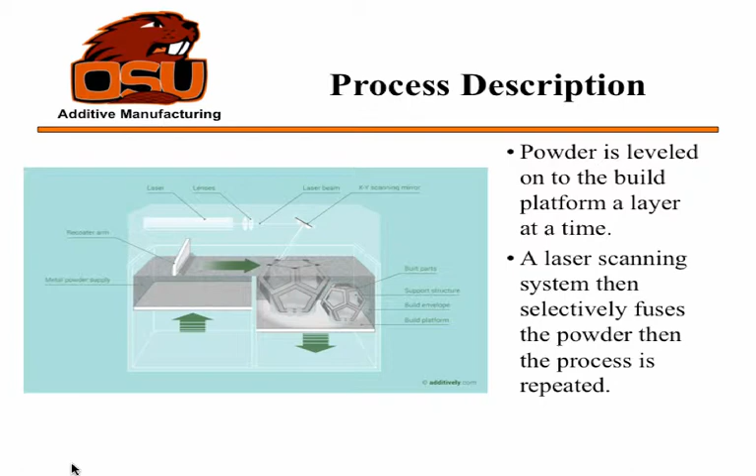Laser sintering with powder bed involves having powder leveled or spread thinly in a layer onto a build platform, with a laser then scanning and fusing where it has scanned, then progressing as it moves the build platform down. It repeats the process.

Some key process features or parameters that affect quality and resulting parts are things like laser power, laser scanning speed, laser scanning pattern, laser scan overlap, so how closely those scans are overlapped, and specific powder properties. Some powders produce a better surface finish than others.

Size of the powder: there's monomodal, which is a single size, bimodal, which is two sizes, a very fine powder and a larger powder, or there's varieties of powder properties.

Powder preheat temperature, build chamber pressure - that becomes important with volatile compounds like aluminum and magnesium, some of the lighter metals will actually vaporize and you'll lose constituents if it's not pressurized - and the physical layer height, so how much you're actually able to fuse.

Laser sintering, especially with a powder bed, is really good at fine features and fine internal structures. Compared to some other methods, it can achieve some of the best resolutions.

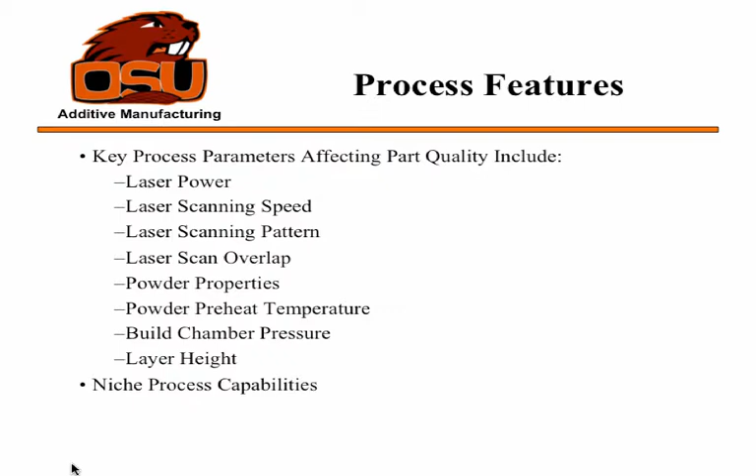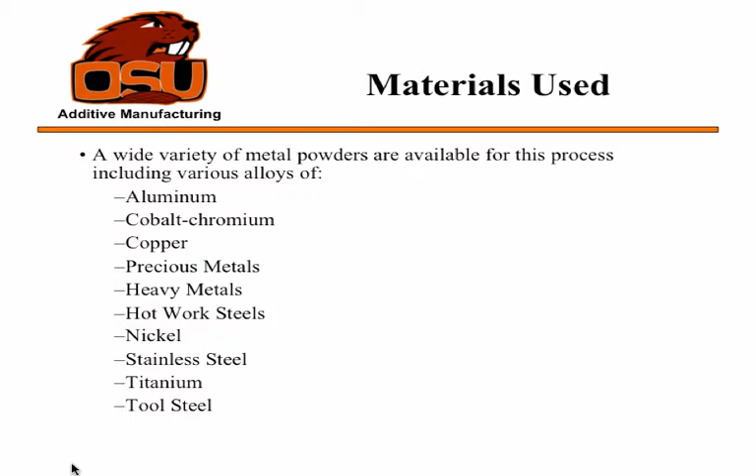Some of the materials used - there's a variety depending on the manufacturer, who offers several different materials and has characterized those for their machines. Various alloys of aluminum, cobalt-chromium, copper, other precious metals, some heavy metals, not a ton in that area, hot work steels, nickel, stainless steel, titaniums, and tool steels - all very useful engineering metals.

One of the case studies I was able to find was from EOS, which is a big player in the laser sintering market, especially with powder beds. They've been around for a long time, and this was in dental restoration, so dental labs.

The customer was Argen Corp, I think, and they make custom dental restorations. You're basically able to print a group of them at a time, and it reduced waste a lot. It was a very manual process prior to that, so it almost completely eliminated rework.

It'd be porcelain over a metal framework, how they do these. I like this quote: a skilled technician using traditional hand operations can make about 20 units in a day, where with this scanner, software, and a printer, they can make 80 units in a day. So that's productivity and increased revenue because of the productivity.

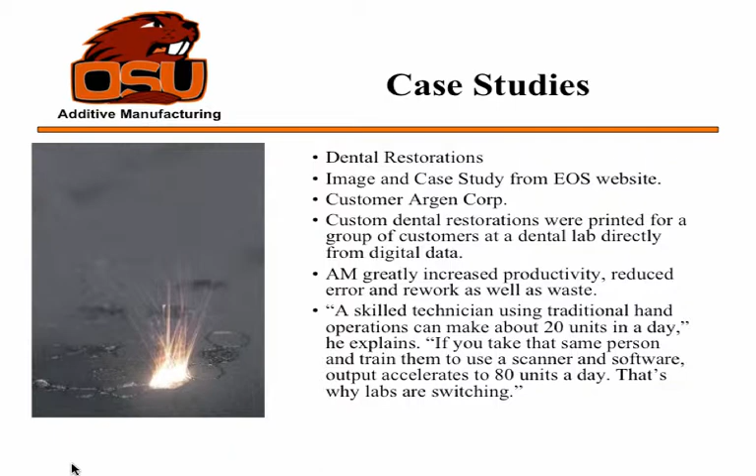Here's another really important application of laser sintering with a powder bed: tooling inserts, specifically for plastic injection molding. You're able to design these with a conformal cooling channel actually integrated into the tool, so you can cool complex features in a very uniform way, which decreases rejection rates and decreases cycle times.

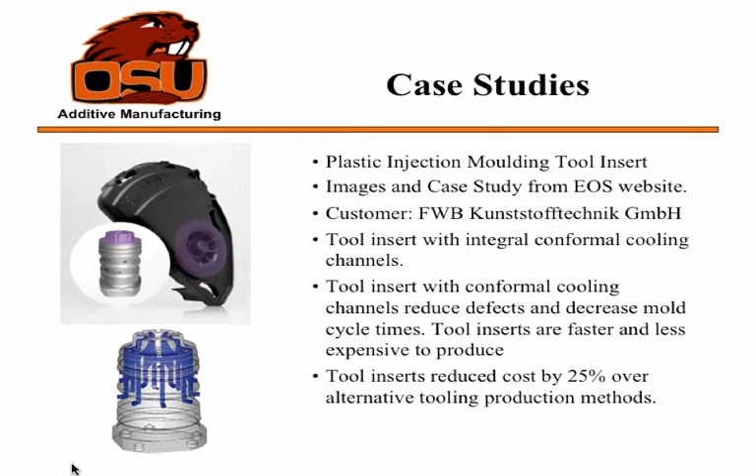It also reduces the cost of traditional tooling because these complex features can be made as standalone parts and then integrated into a larger mold, where the majority of the mold is fairly simple, and this one feature is very, very complex.

EOS is based out of Krailling, Germany, and they've got a variety of machines. The 280 and 290 are kind of their workhorses. They also have fiber lasers, 200 or 400 watt, with the same build size. The 290 has some additional post-processing and other material property monitoring.

They have one specifically for precious metals, for jewelers and things like that, and it has a more meticulous powder handling system because you don't want to just let gold powder go everywhere - it's really expensive.

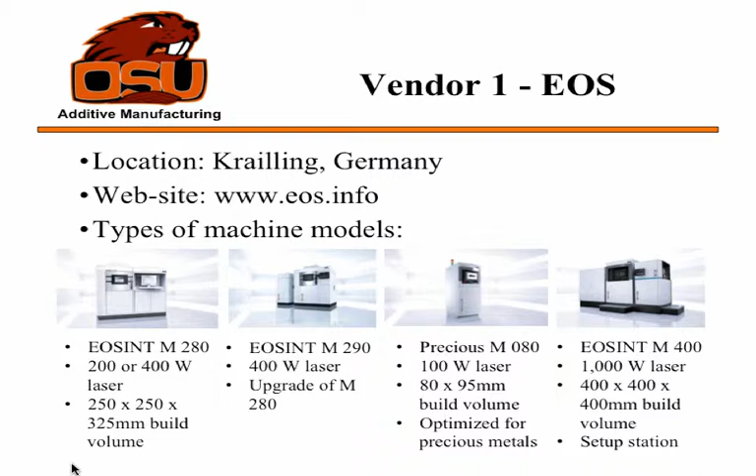They also have a more production-based machine where you can have interchangeable build setup stations to ease and speed up production, a large build area, and a 1 kilowatt fiber laser as well. They've been in business since 1989, and making laser sintering machines for 20 years.

They started in 1995, and they have probably the majority of the market share with over 1,000 machines sold to date. They also offer both metal and plastic laser sintering.

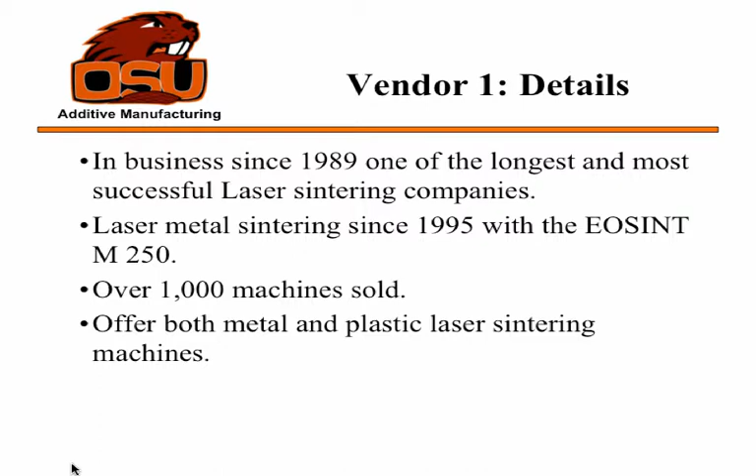The second vendor I wanted to highlight is called SLM Solutions. They're also out of Lübeck, Germany, and they've got an entry level 100, 200 watt laser with a small build platform, then step up to a 400 watt or 1 kilowatt laser with a larger build platform, about the same as the EOS 280, 290.

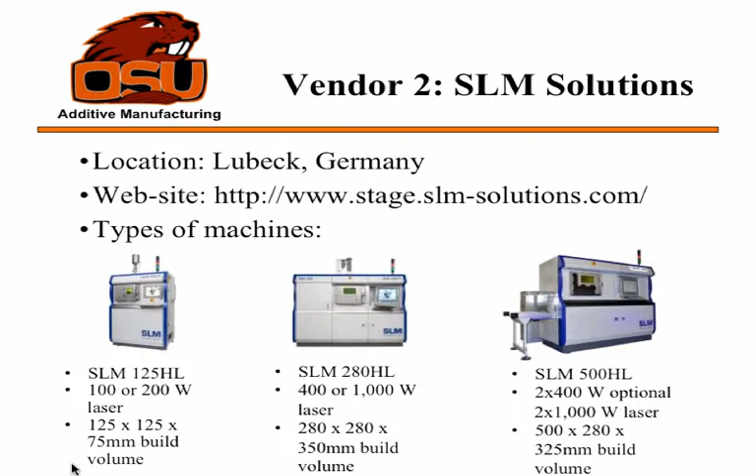But their big production machine can be equipped with up to 4 lasers, for a combined laser power of up to 2.8 kilowatts, which is just huge, and a really big build volume, again with onloading and offloading modules.

They can achieve some of the highest build rates I've seen in laser sintering, up to 105 cc's, cubic centimeters per hour, which is just flying. They've got various iterations and applications of that.

The lasers can also be coupled together so you can have them track exactly the same point, creating two of the same part, or you can have them all work independently, varying whether they use the 1,000 watt versus the 400 watt laser.

They'll typically use the 1,000 watt laser for fusing the center, and the 400 watt laser for fusing the outside edge, because it will give different material properties and different grain and microstructures, depending on various build parameters.

They'll also do a pressurized build chamber for volatiles, where some others will try to operate at a partial or low vacuum. They actually do a pressurized build chamber for magnesium alloys and things like that.